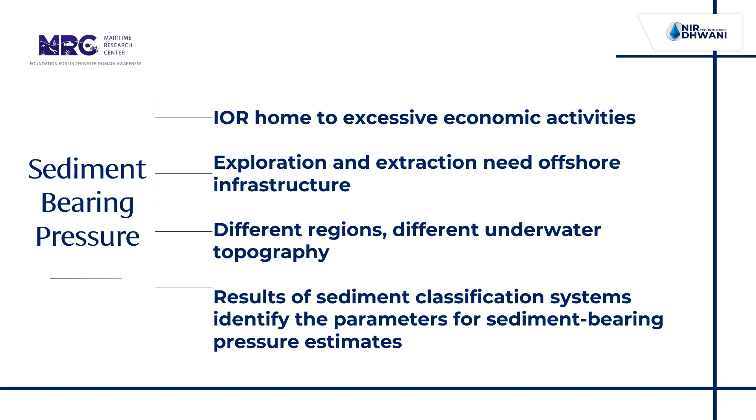For this, a lot of offshore construction and exploration is going on. For example, there are oil rigs, various types of ports, offshore construction being built, and thus the effective sediment classification method should now estimate the sediment bearing pressure as well, including the strength and stability of the sediment strata. Now, one of the most significant applications of acoustic seafloor classification is sediment bearing pressure. For this, the results of the sediment classification can be utilized, and we'll further see what parameters would be necessary for understanding the sediment bearing pressure estimates.

Sediment bearing pressure basically refers to the force per unit area exerted by the sediment on the surface it is in contact with. It is generated when sediment such as soil or rock is placed on or against the surface, and can be influenced by various factors like the weight, the density, the moisture content of the sediment, and also the shape and roughness of the surface of the sediment.

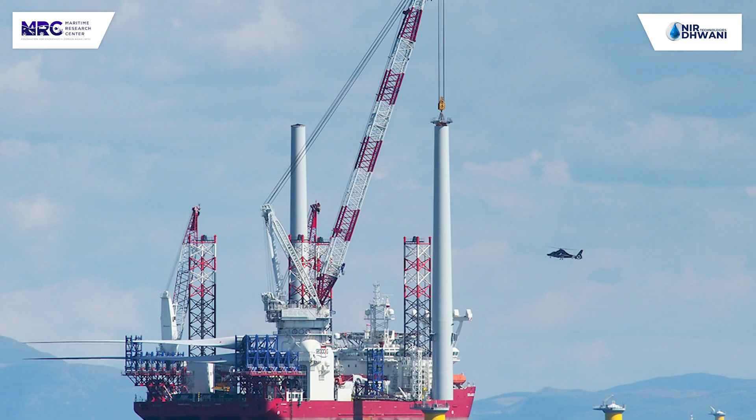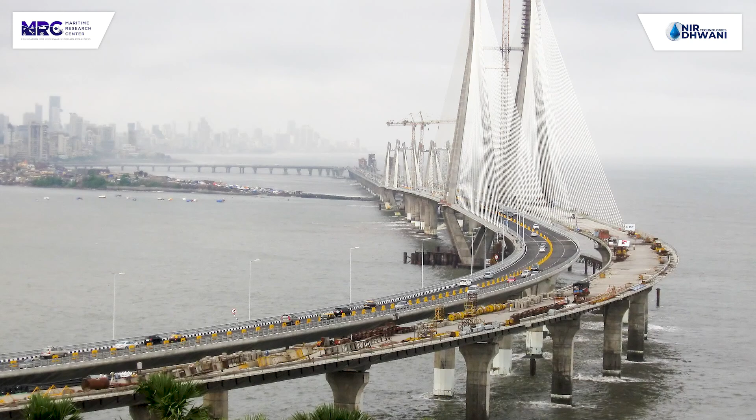This sediment bearing pressure, which can be the load carrying capacity of the sediment layers without excessive settlement, is very crucial in many engineering and geotechnical applications, which include foundation design, retaining walls, and soil stabilization. And thus, it becomes necessary to have proper sediment bearing pressure estimates to ensure that whatever offshore structures are built, they are built safely and securely to prevent any damage or failure due to excessive pressure or settlement.

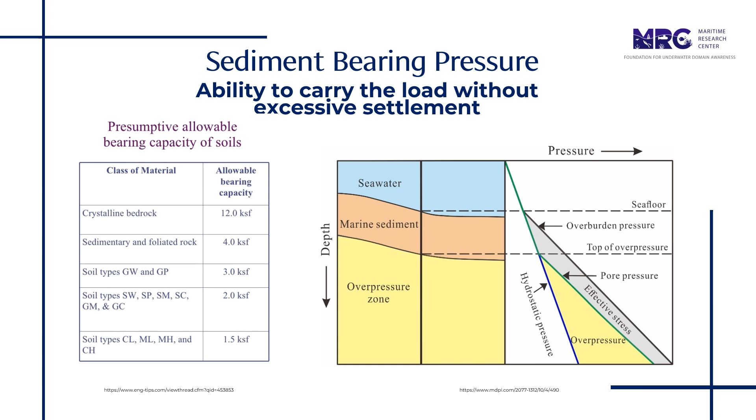Thus, overall, understanding sediment bearing pressure is crucial for the safety and stability of structures and preventing costly and dangerous failures. Such structures are vital considering the economic growth and strategic importance. In fact, knowledge of initial sediment bearing pressure estimates is necessary during the initial design phases of a particular project. Not only offshore, but any construction over an inland water body, say a dam, a bridge or a sea link.

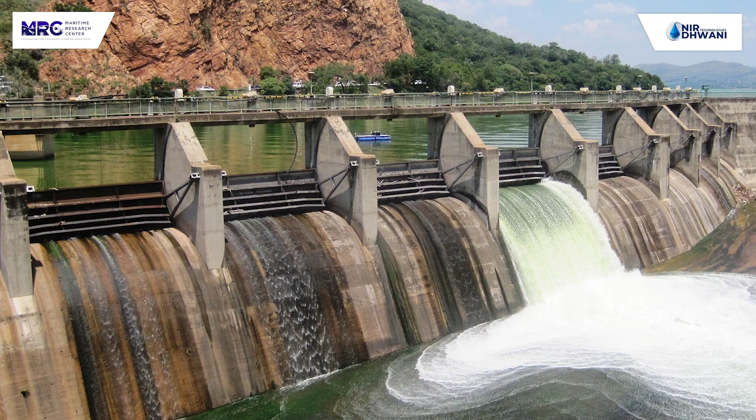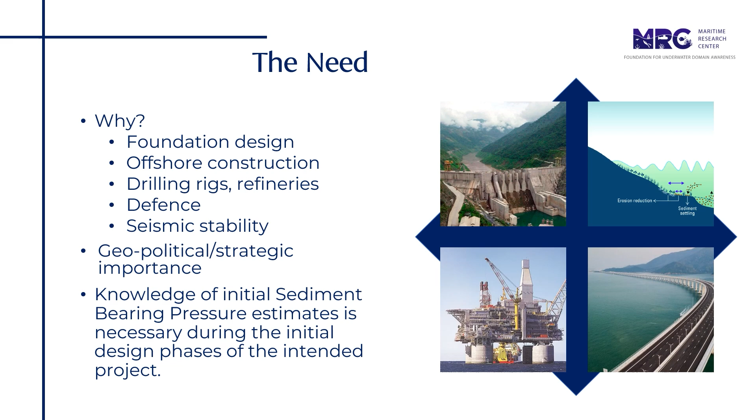So again, this estimate would be crucial in the initial design phases, but it is to be noted that the awarded authority or the contractor of the project would not have the capacity, resources, or expertise to conduct such detailed surveys for these bearing pressure estimates. Thus, we'll be going through various case studies in this module, which highlight the need for a comprehensive database for sediment bearing pressure in order to have better accessibility for third party contractors as well.

Again, understanding sediment bearing pressure is also crucial elsewhere. One such area is when natural gas hydrate bearing sediments are being considered, because these sediments are considered promising energy sources due to their considerable resource and high energy density. And with rising technology, there has been growing global energy demand and more commercial natural gas hydrate exploitation.

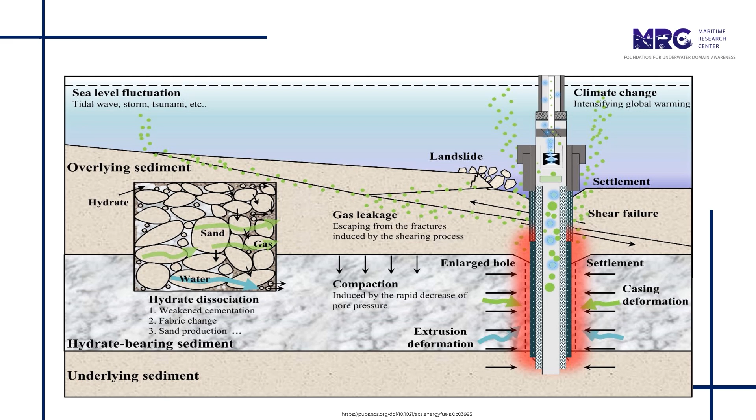For this we need proper analysis of the mechanical and geotechnical characteristics of these hydrate bearing sediments, because the various parameters, like the hydrate saturation, effective confining pressure, sediment composition, temperature and pore pressure, all influence this mechanical behavior, which needs to be understood in order to have proper mechanisms and safe operations for extracting gas from these sediments. Else it would lead to a lot of settlement and landslides, triggering potential failures, which may be drastic when we consider the economic potential of these resources as well.

Sediment bearing pressure is also significant in the design and strength of the structural foundation of tunnels. It is utilized to calculate the depth of the foundation, the depth of underwater tunnel systems, and the profiles of the tunnel cross sections. For example, there was a tunnel built under the Xiang River in Changsha, China. The tunneling approach was founded on such concerns because the overburden of the tunnel would consist of sludge strata, gravel strata, and various weathered states of soil.

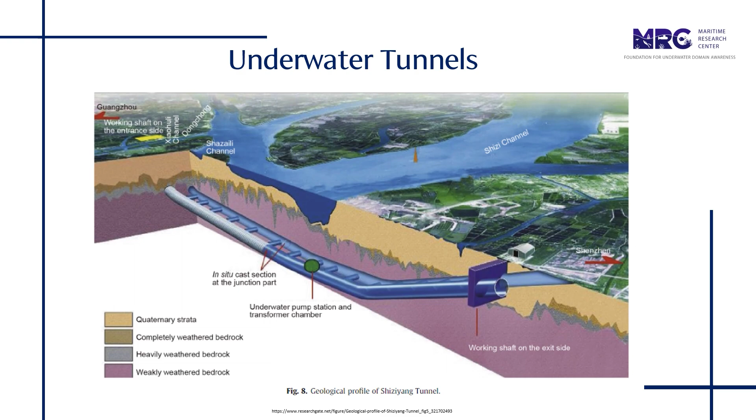Thus, a minimum overburden design method was to be developed, and in this, sediment bearing pressure was a crucial parameter. Now, the sediment bearing pressure also has a lot of application when we come to offshore windmills for offshore energy. In fact, research data shows that the foundation investment accounts for around 20 to 30% of the cost of an offshore wind turbine, which leads to higher cost for offshore wind power than the onshore ones.

Therefore, selecting the suitable type of foundation for offshore wind turbines is crucial in developing any such wind farms. Also, the calculation of the foundation's bearing capacity would be based on the compressive strength of the soil or the rock strata present on the seabed. Also, the weathering effects and the hydrodynamic effects lead to the weakening of the bearing pressure, and that needs to be understood in order to have a proper safe design.

There, the foundation is also subjected to long-term cyclic loads, which causes the seawater to erode the rock and the foundation, thus reducing the ultimate bearing capacity. And as of now, there is no suitable rock mass classification for evaluating the quality of bedrock, or any theoretical method for accurately calculating the ultimate end bearing capacity. So acoustics can also play a major role in this.

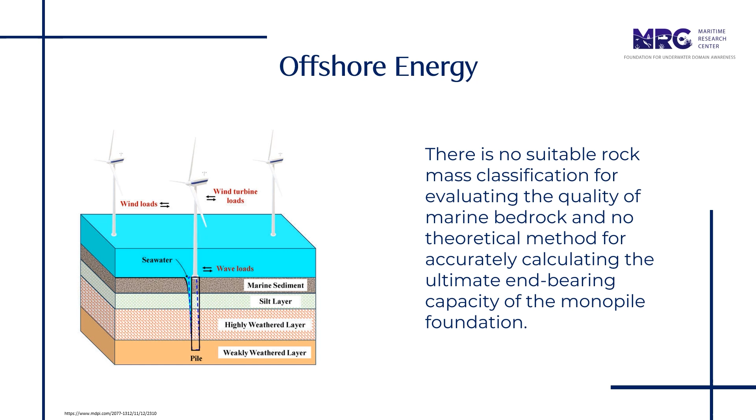Then lakes can also be used as basins to investigate the various cases of slope stability under various static and dynamic loading conditions. A lot of studies have been conducted in geophysical, sedimentological, and in situ geotechnical methods to discuss the control of physical and geotechnical properties for slope stability. Various studies present significant advances in understanding slope stability and the challenges in determining these physical and geotechnical properties.

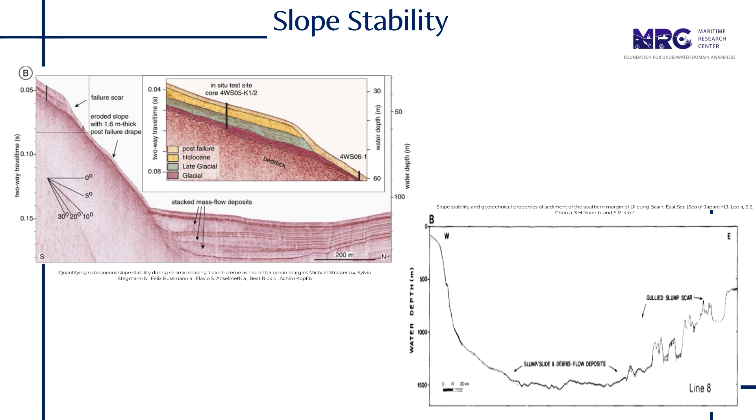And if we consider slope stability, acoustics can play a major role in aiding the calculation of sediment bearing pressure; as you can see in the figures, we can derive slope stability graphs like these. Apart from that, sediment bearing pressure is also crucial in determining a bridge's safety and settlement, and to determine the foundation's depth.

So there would be oil rigs and, as I mentioned, a lot of bridges over rivers or particular sea regions, and the foundation work requires detailed design. The settlement should also be monitored every year during floods for such constructions, and protection measures taken accordingly. Also, local erosion around the bridge's abutment can lead to bridge failure. Routine inspection and maintenance is required for such bridge structures. Thus, sediment bearing pressure plays a crucial role in foundation design.

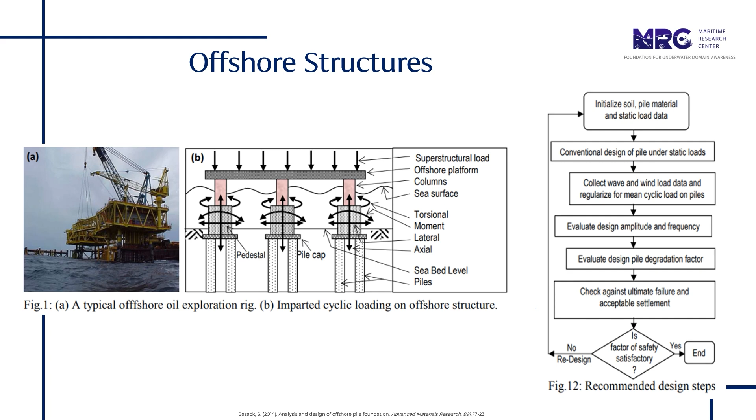Similarly, there have been a lot of bridge failures, like the Higashikobe Bridge and Akashi Kaikyo Bridge, that have been damaged due to various hurricanes or sediment-related problems. Again, the Mumbai Bandra Worli sea link also required major engineering solutions to the problems they faced because of the highly variable geotechnical conditions at the foundation bed.

Thus, for any type of construction, this sediment bearing pressure estimate would give a proper initial understanding of what kind of design methodology can be implemented, what kind of foundation design can be done, and what kind of pile testing can be done.

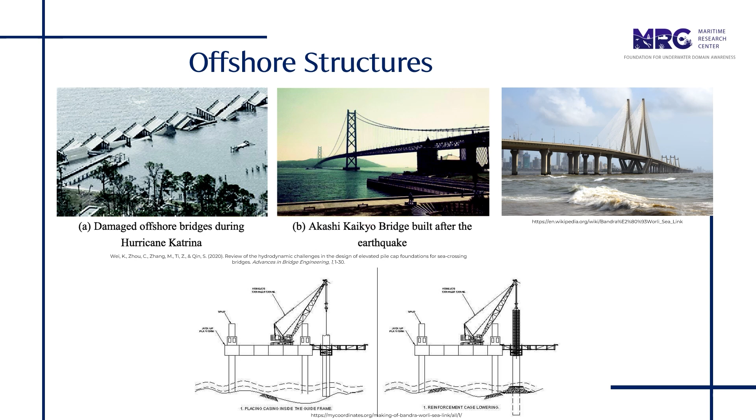Similarly, ports act as a primary source of trade and commerce, handling approximately 95% of volume and 70% of value of India's external commerce. Port organizations need to adopt modern technology like computerized information systems, GIS techniques, and acoustics for their expansion operations. So for offshore port-related structures, again, sediment bearing pressure would play a crucial role in the expansion of ports and related operations.

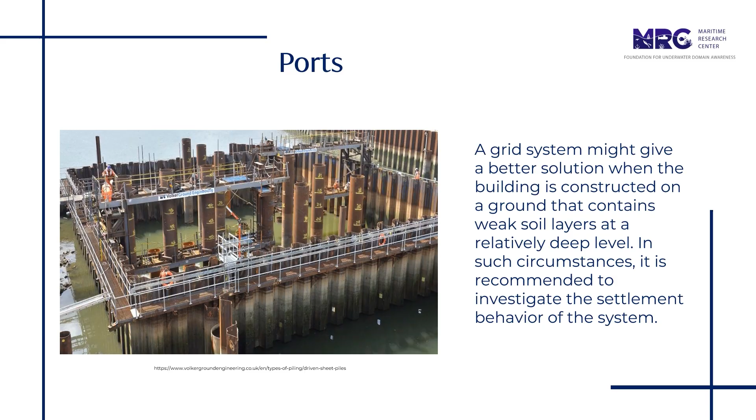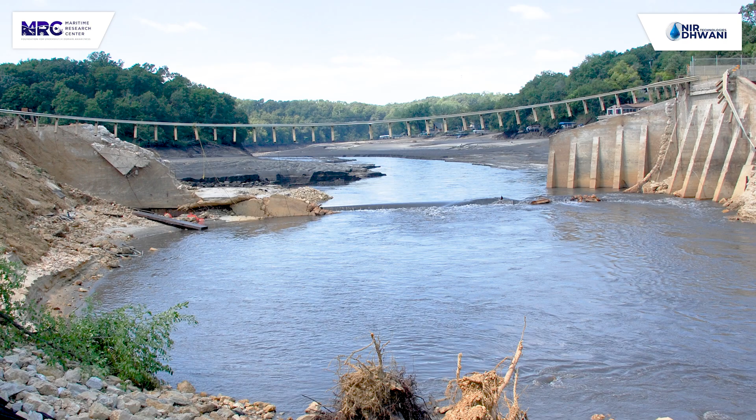Then coming to freshwater systems, extreme sedimentation rates are exhibited in Indian river systems. Riverbed sediment characteristics do not rule out the possibility of various sediment mass movements, which lead to various hazards. Improper assessment can lead to settlement of bridges, as you can see in the image. This can lead to loss of infrastructure and have social and economic impact. There can be failure of dams due to excessive bearing pressure estimates. Thus, sediment bearing pressure is crucial not only in offshore structures but in freshwater systems as well.

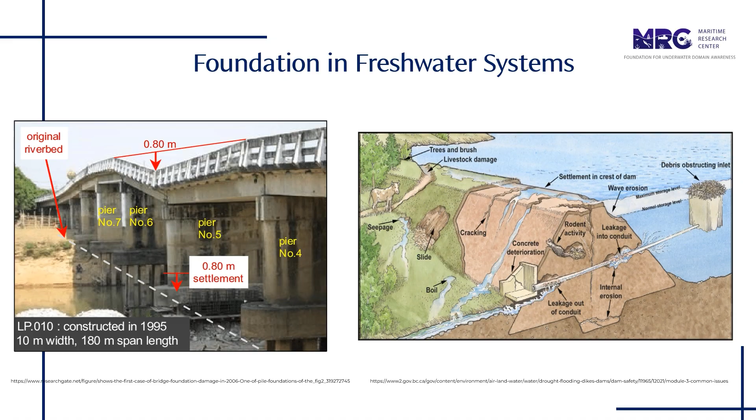This calls for utmost importance to develop a cross-disciplinary knowledge base and to investigate sediment deterioration, the deformation of sediment, and slope failure processes to properly understand them. Now, regarding spatial and vertical resolution of data collection, there are very few available data sets of bearing pressure, and they frequently lack detail.